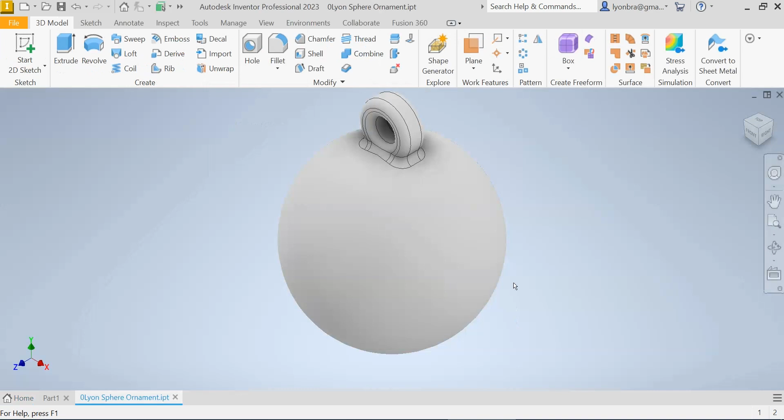Now, if I try to sketch on the surface, it's not going to let me because it's a curved surface. So if I click here, it's not letting me select anything.

I have to make a work plane. So I'm going to click on the drop-down menu and go down to tangent to surface and parallel to plane.

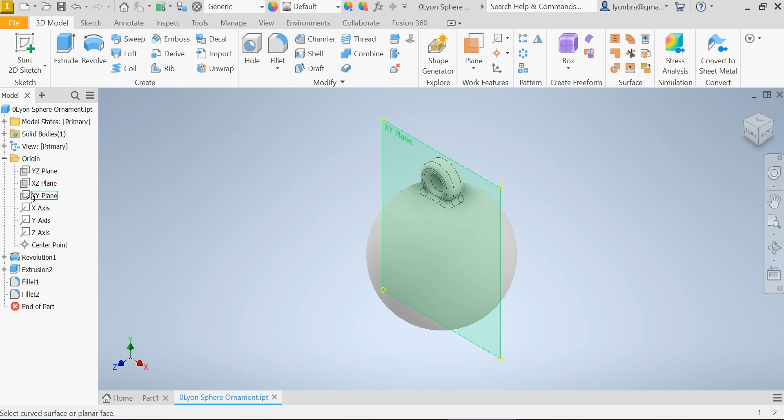I'm going to open up my origin. I'm going to choose my XY plane. And I want to be right at the front of my ornament here.

Now I can go into my sketch. I can click on my work plane. And there, now I can make a text field.

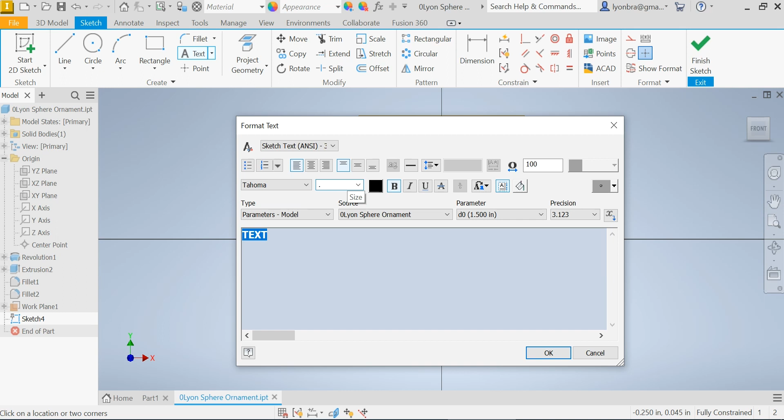It's a good idea to make your text all in capital letters, and that will become clear in a minute or two. So I'm just going to write text. I'm going to make it bold, and I'm going to make it maybe 0.4 inches tall. I'm going to click OK.

Now, if I want to make sure this was exactly centered, I could go back into my text field, highlight it all, and make it centered vertically and horizontally.

And then use my vertical constraint to make the midpoint vertical to the origin, and my horizontal constraint to make the midpoint here horizontal with the origin.

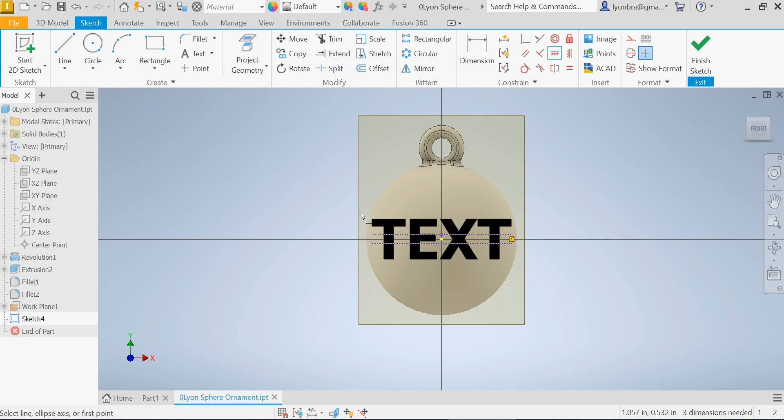It's also very important that it does not extend beyond the sphere that you're actually going to be putting the text on. Okay, so I'm going to click.

Now, before I click Finish Sketch, I'm going to click on my text one more time. I'm going to right click and I'm going to convert to geometry.

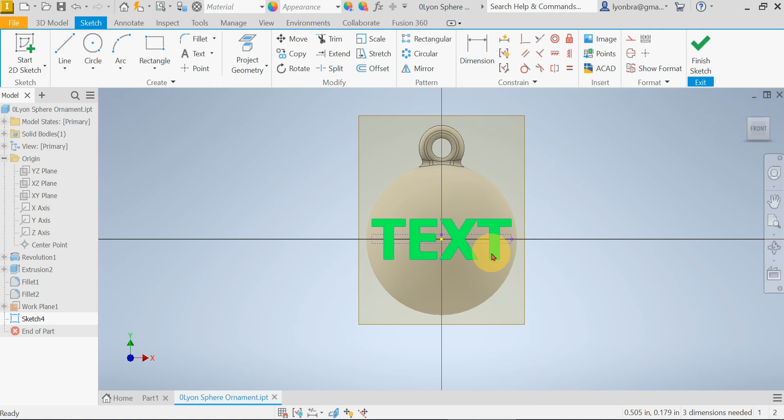This is so you're limited in the fonts. You need a font that has the outline, because a lot of these are just simple lines and you can't extrude just a line. So the one that seems to be pre-installed on most Windows computers is Times Out.

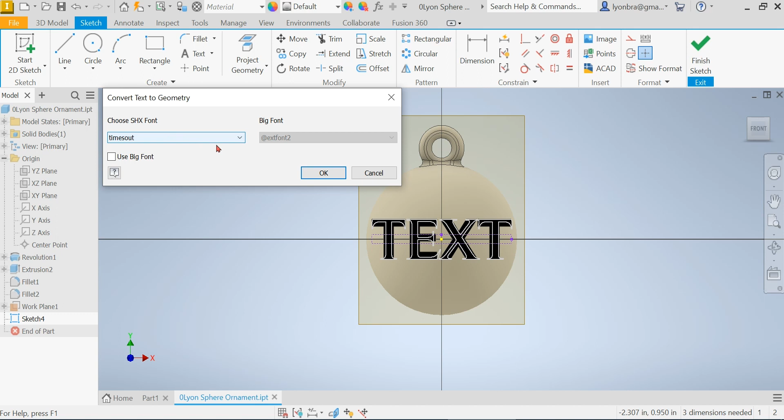It's Times New Roman outline. Okay, so I'm going to click OK. All right, so that's the text that will appear.

So now I can finish my sketch. Now I can't use emboss. Now if this was a cylinder, I'd be able to use that. I actually have to make a 3D sketch.

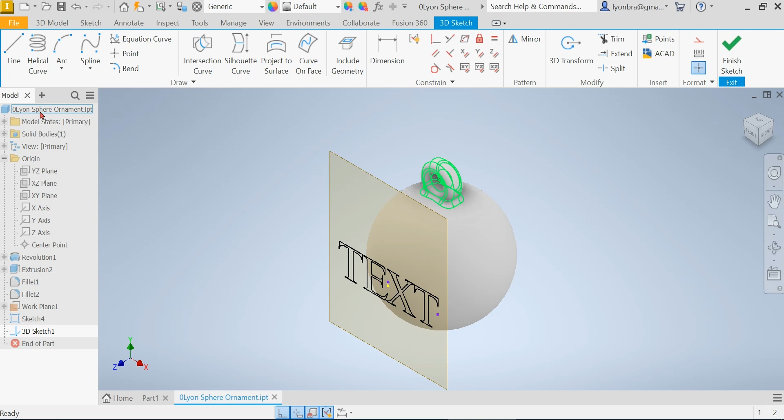And I need to project to surface. So I want to project onto this face. And I want to do these curves.

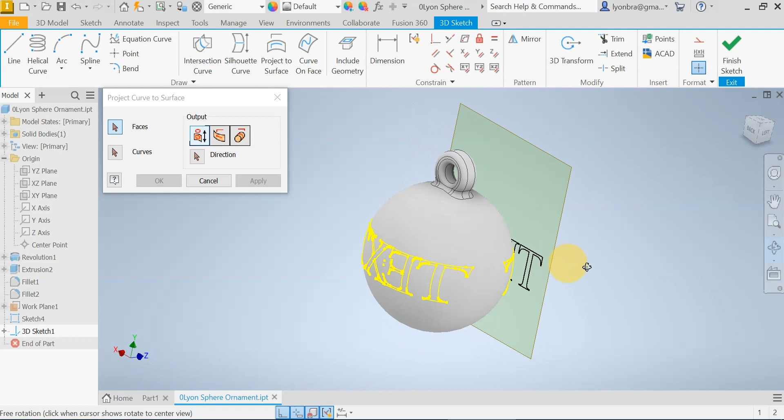If I hit apply, you'll be able to see it wraps. Now, since this is a sphere, it will try to wrap all the way around. You can see it's kind of backwards on the back.

This is why it's important to make sure it's not wider than your sphere. Otherwise, it'll end up looking like this, and it'll be all smeared and smushed together.

So once you're happy with that, once you hit apply, cancel out of this. All right, now I'm going to finish my sketch.

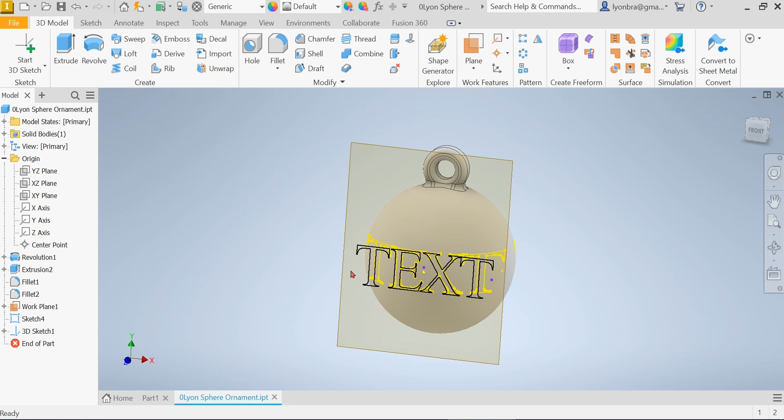Now right now, my work plane and my original text is in the way. So I'm going to right click on my work plane and turn off visibility. And I'm going to do the same thing for my sketch 4 here, turn off visibility.

Now I'm just left with what's on the sphere. Now I can't extrude this. I can't emboss it. And I can't even...

I have to do split first. And then I can use my thicken and offset. So I'm going to split.

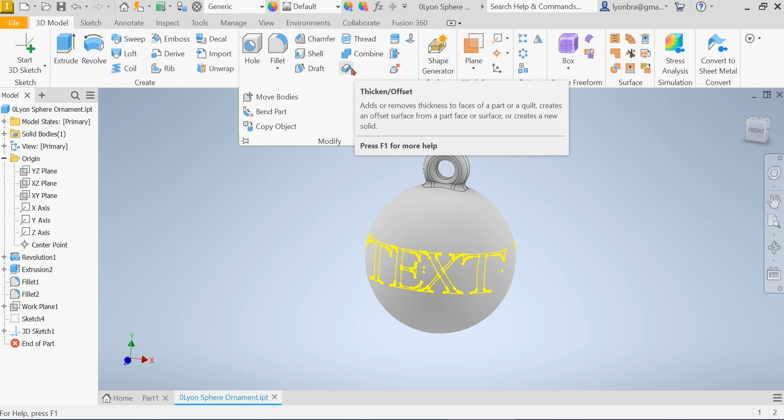So I'm going to go one letter at a time. So I'm going to click on this and then what face? The sphere. And I'm going to click OK.

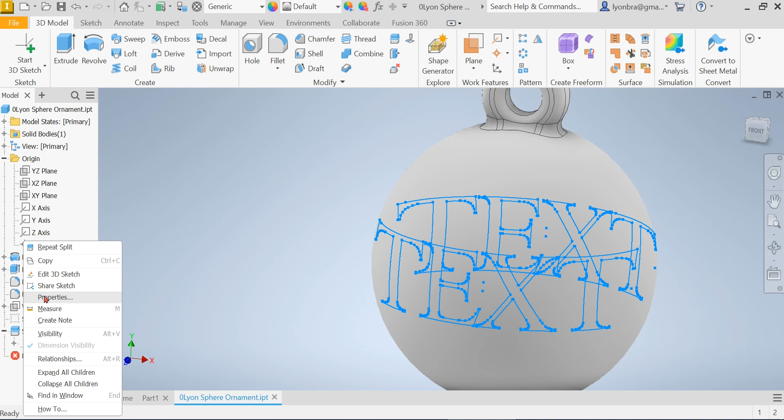Now the rest of it disappears. Don't worry. Click on the plus sign next to your first split. Right click on your first 3D sketch and turn on visibility again.

Now you can go back to your split. You can go to your E, or whatever your next letter is. Okay, for the face, I want this face, and OK.

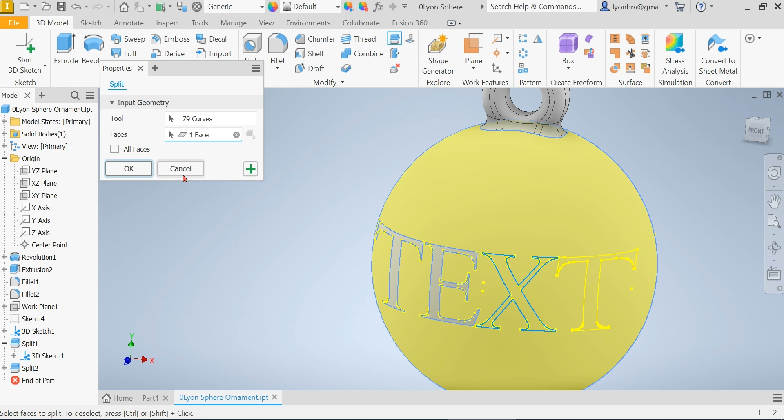Then I go to my next letter on this face, OK, and then my next letter. So you have to do this for each letter that you have, in this face. Okay, so now those four are

now a sketch that I can thicken and offset. So I'm going to choose this.

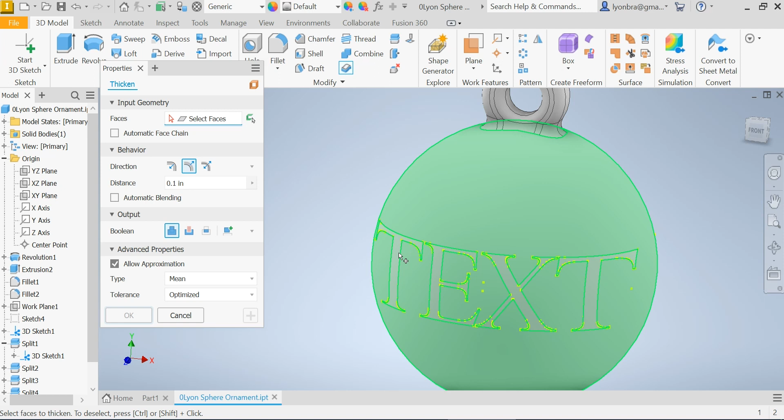I'm going to choose my T, choose my... all right, let's try this one at a time. I want to cut it, I want to cut it inward, and I want to cut it 0.02.

All right, I'm going to do the same thing for my E. Cut it inward, 0.02, is there. Okay.

Thicken and offset my next letter. Cut inward. And then I'm going to do my last one here.

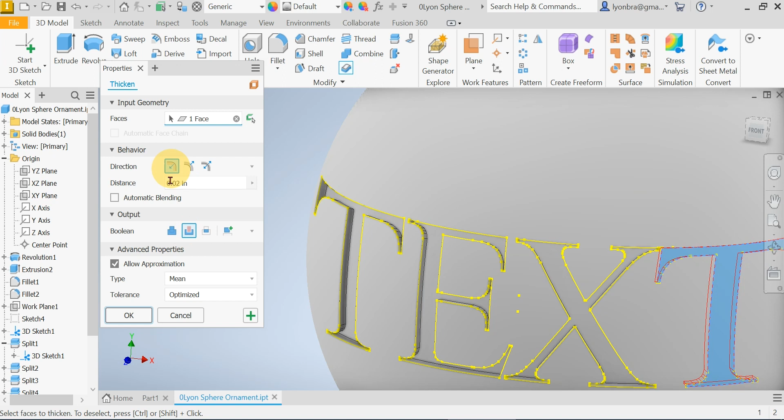And cut inward. Okay, now if I want to see what that looks like, I can go to my original 3D sketch, 3D Sketch 1, and turn off visibility. And now you can see the text is on there.

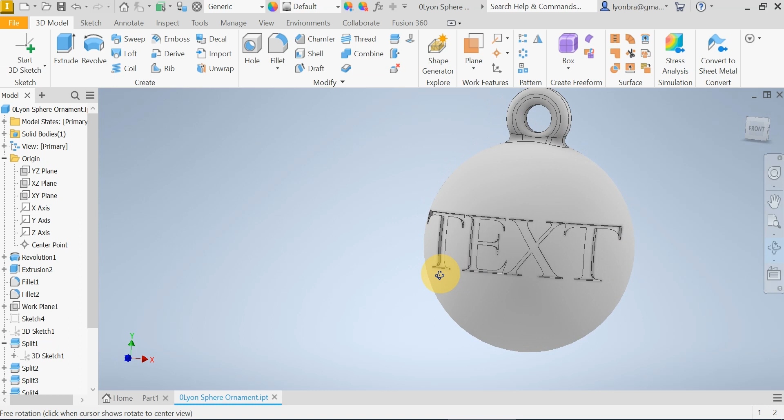And don't worry, what was on the back is clear. So you could put something on the back as well. Okay, and so that's how you can put text onto a sphere object.